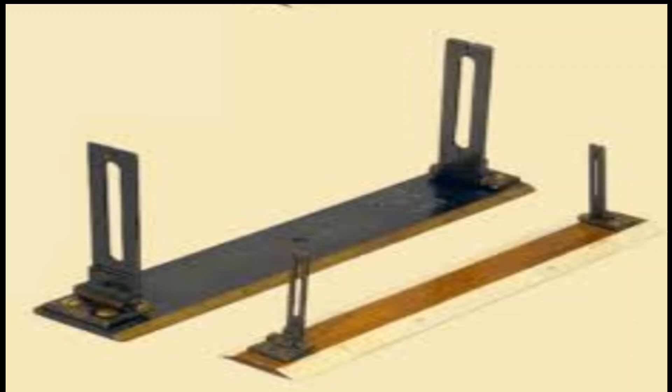So this is your alidade over here, and the other type of alidade is known as the telescopic alidade, which is right in front of you. So we can use either of the ones. And this is the other alidade.

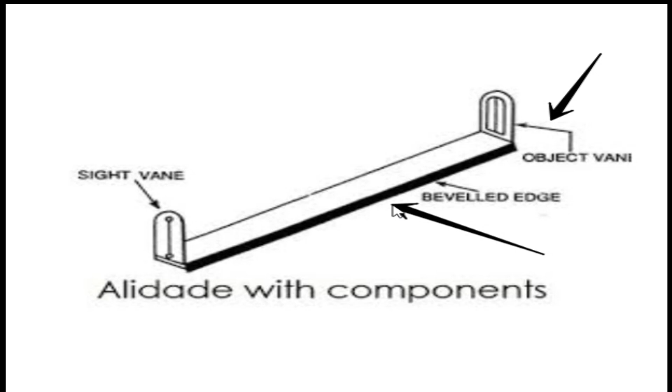Over here you have the object vane shown here. This is the beveled edge. It also consists of a scale over here, along which you use a pencil to mark it, and this is your sighting vane over here. And these are the components of an alidade.

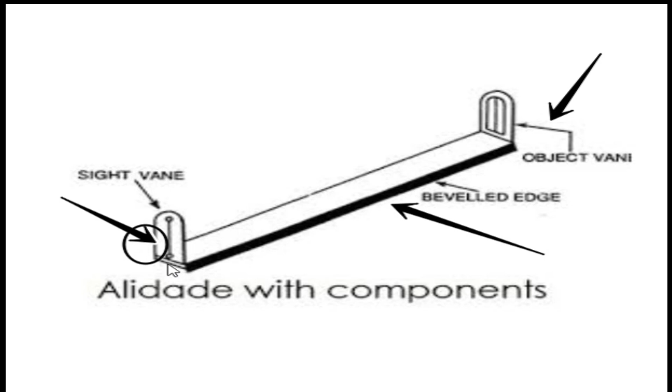Now, in order to use the alidade, which I'll tell you briefly over here, what we do is we place the eye somewhere around here in this location, as you can see over here, right? We'll place the eye somewhere here onto this thing, and right from here you are having an eye point over here.

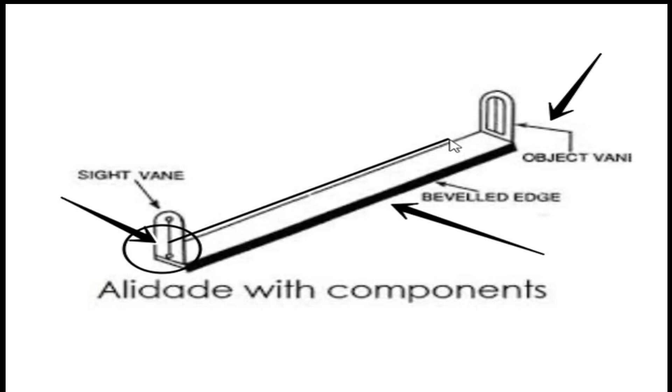From here we are going to sight the cross wire in this one, and this will proceed further and it will lead wherever your location of the object is, and that location could be a ranging rod over here or corner of a building or anything. So this will be known as the line of sight for using the alidade over here.

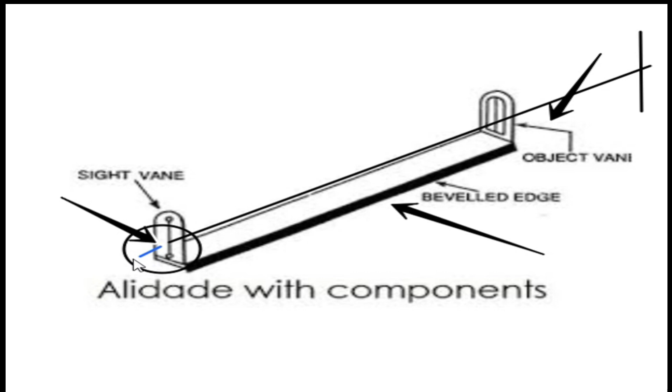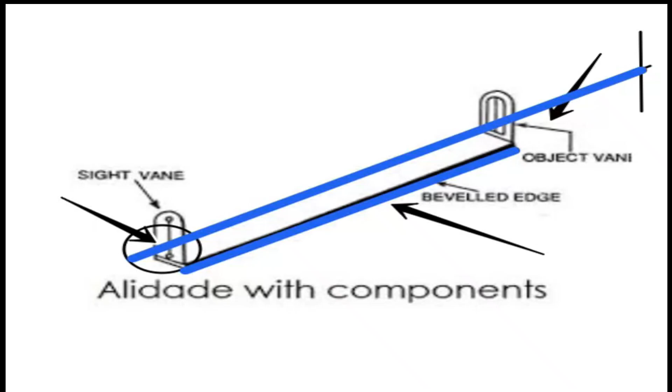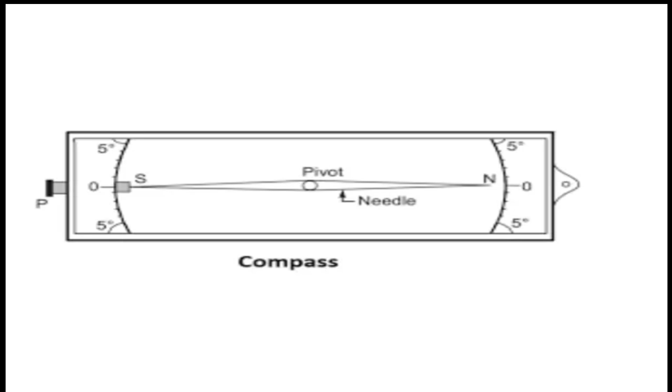Now this is a trough compass, and this is normally used to orient the north. How we do it? We'll do it in the practical. And the other type of trough compass which has got particular details is over here. Like you can have a look in this figure. Right in the center you have a pivot point. The pivot point is a point along which the needle will rotate.

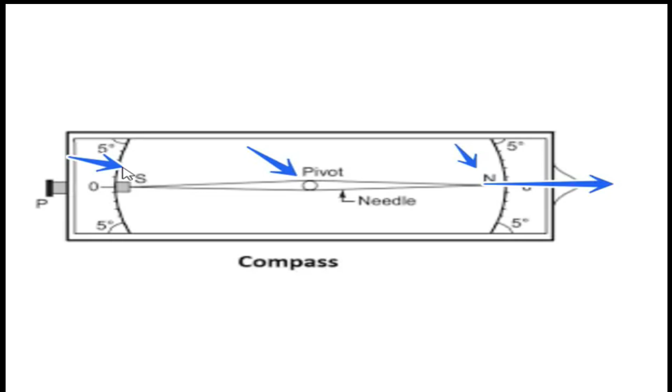Then here you have the north in the needle, and this is supposed to be the true north as being indicated by this blue arrow. So this will point towards the north always onto your drawing sheet. Then here you have of course the south as well, and you see that there is a variation of 5 degrees either way, both sides. So here you see it's 5 degrees and here you see 5 degrees.

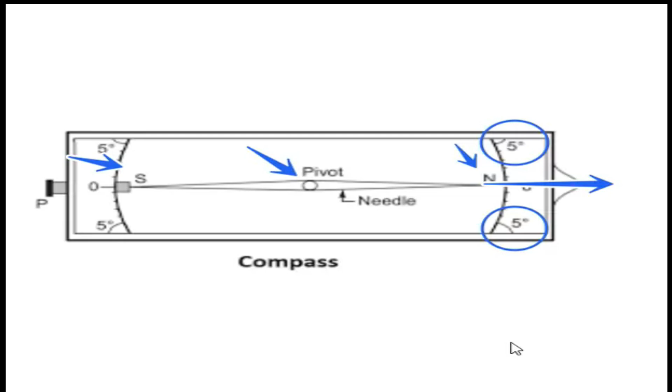So in case the needle is differing from the north, we will either move the table or we will move the trough compass and make it point to the true north over here.

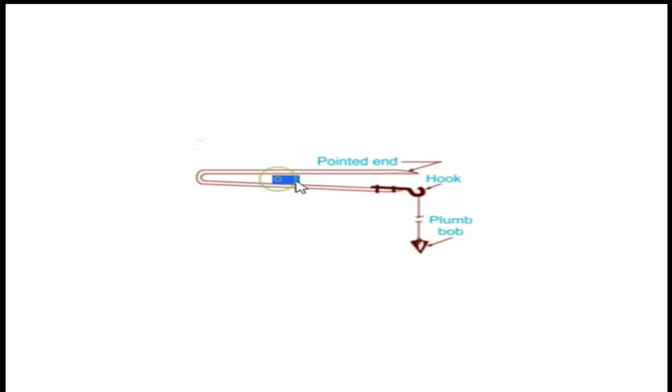Now this is the U fork. This is how it looks, and when you need to use the U fork, you take the table and the table goes like this. So here your table is, and this is how you take the movement of the U fork so that you can transfer these 2 points right onto the ground.

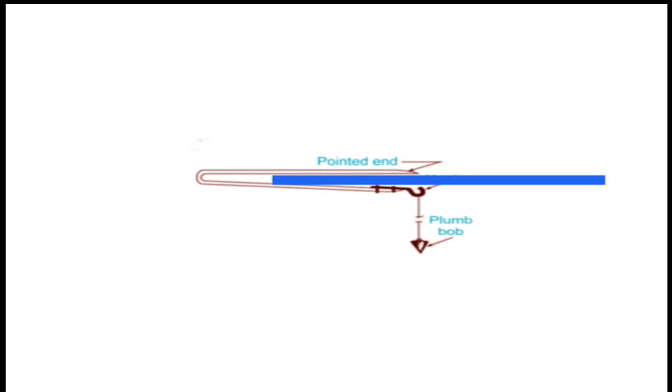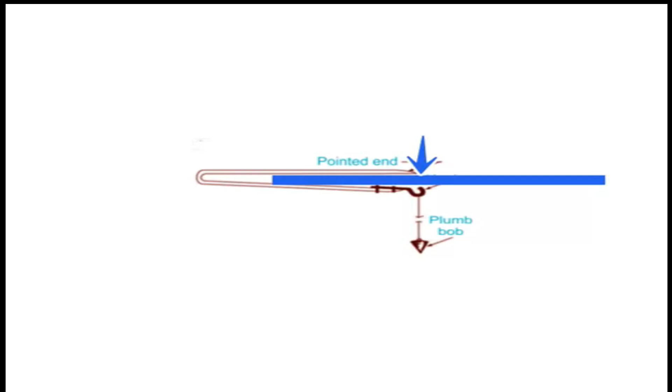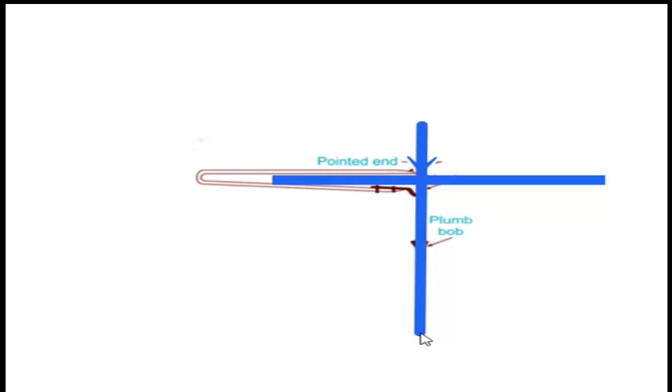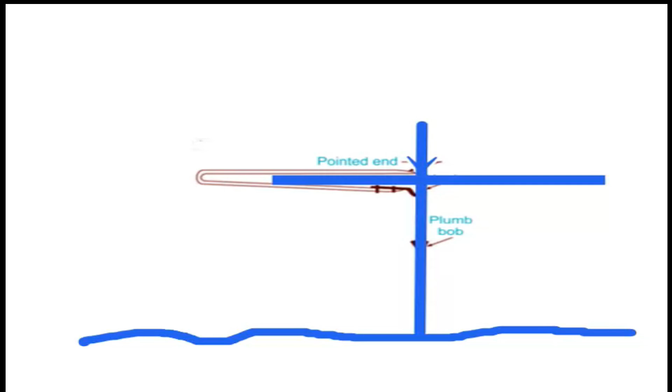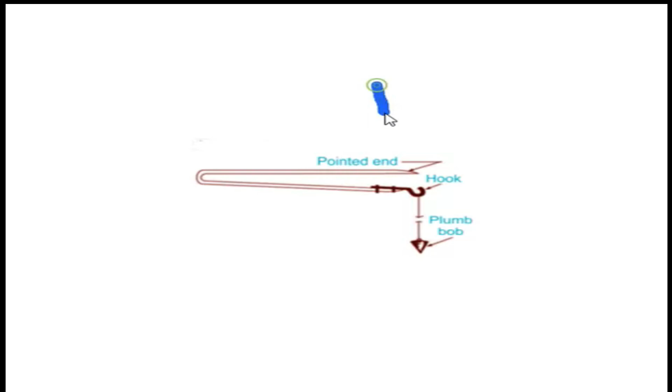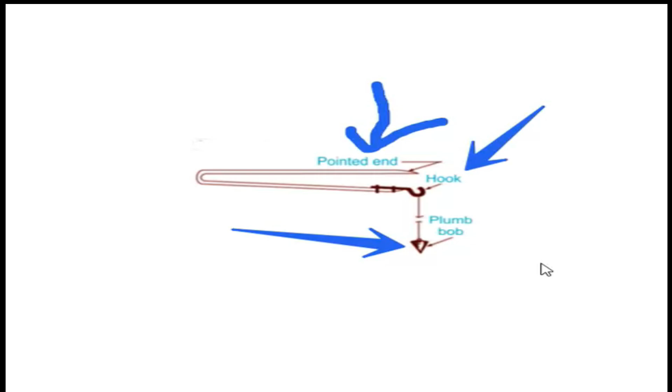So as far as this U fork is concerned, here you see that there is a pointed end, and then you see it has a hook, and with this hook the plumb bob stays tied up, and the rod and the thread could be as per your requirements so that it reaches the ground. Over here is the assembly of the U fork along with the plane table.

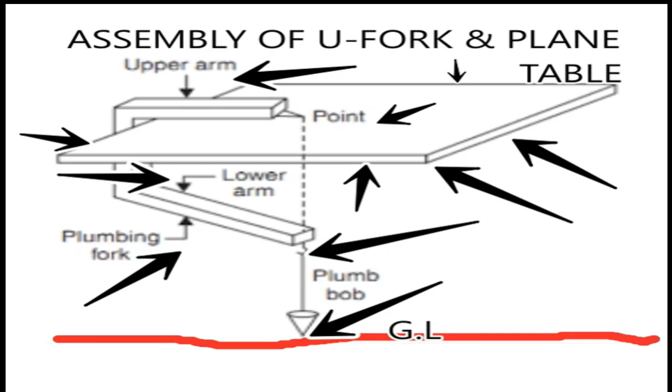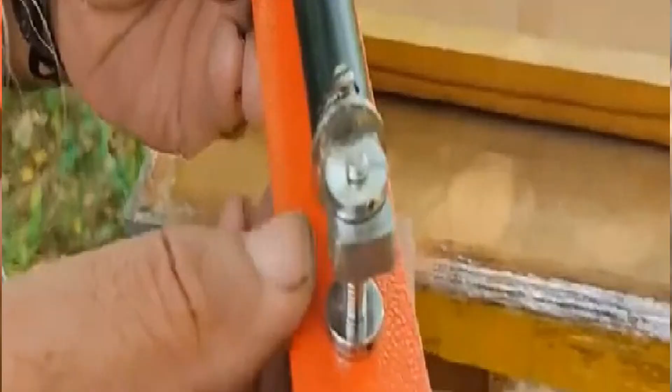We have the bubble tube, and as you can see there is a regular movement of the bubble. So as we set it into the center, we put it in two directions, one diagonal and the other horizontal, to be sure that the table is leveled properly.

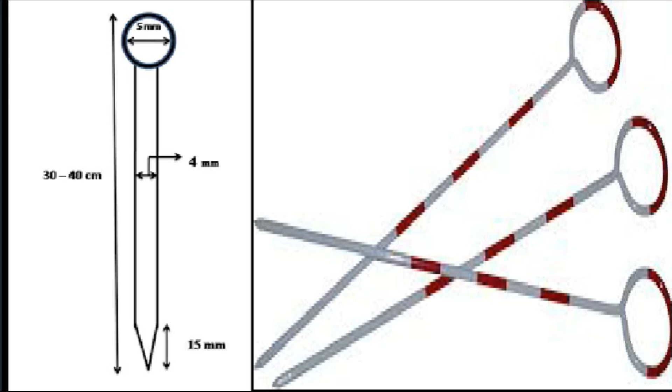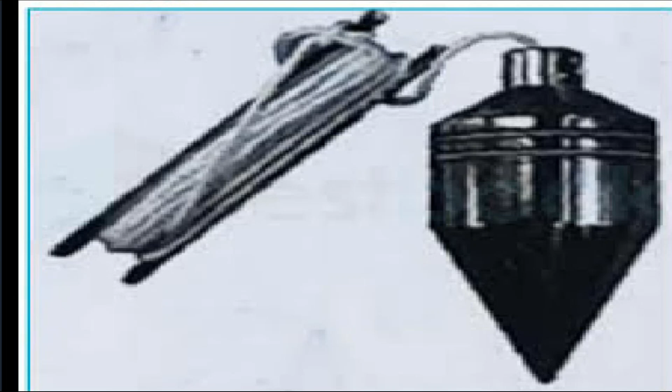Finally, we have the arrows over here, and then you need a tape as well, and lastly the plumb bob, which we have discussed in our old videos.